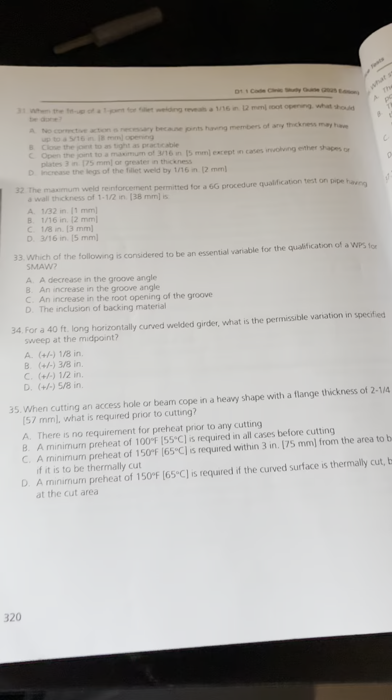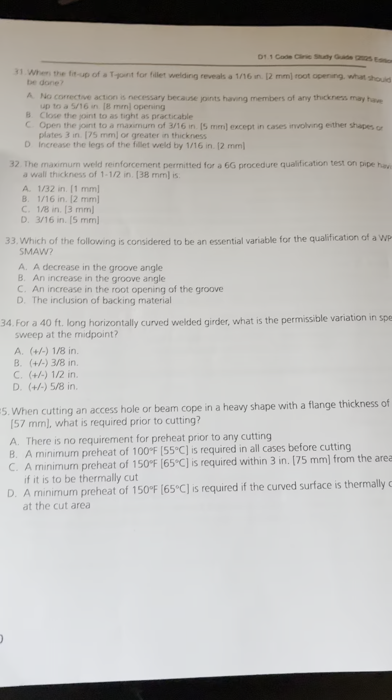Let's go for another question on the CWI test. For those who want to take the Certified Welding Inspector test, let's go ahead and see how to navigate the code book. Let's look at question number 31.

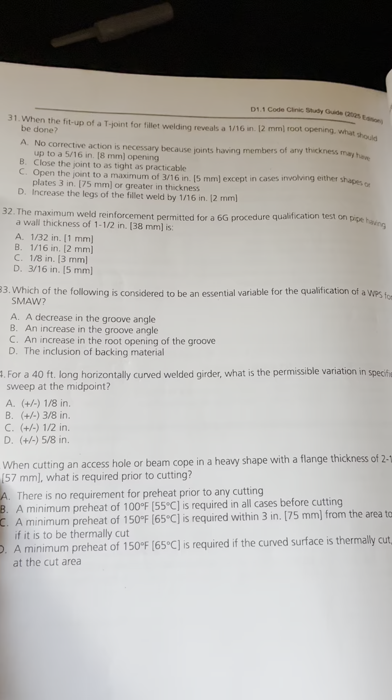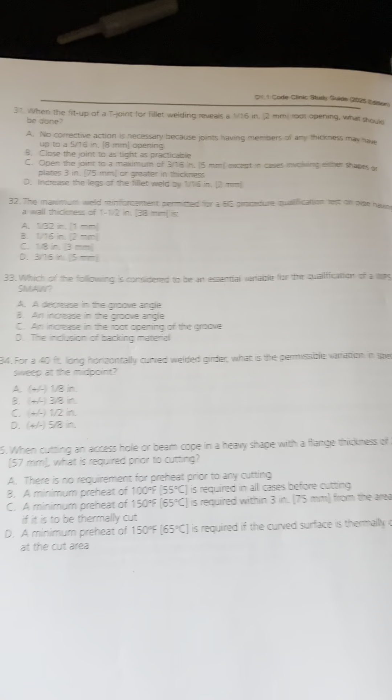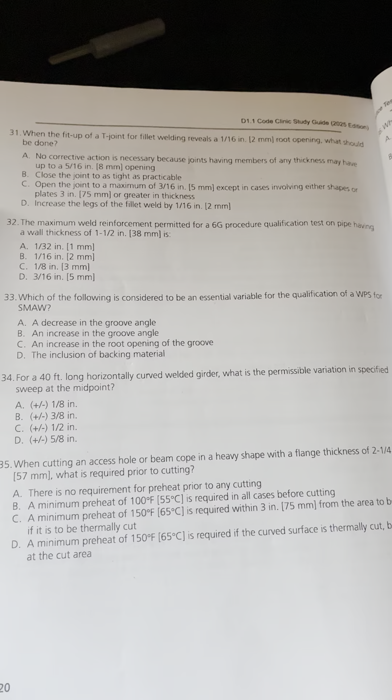When the fit up of a T-joint for fillet welding reveals a 1/16 root opening, what should be done? There are multiple ways to address these questions, but the easiest way I have found

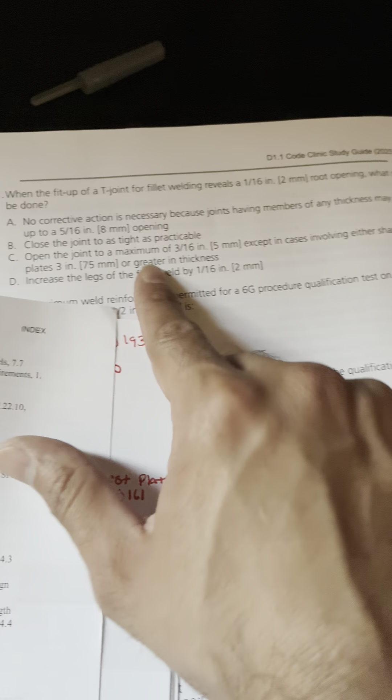is by going to the index. On your index, what are you going to do? I have tabs and I have notes, so there are keywords you need to look for. So you have fit up, T-joint for fillet welding.

So I'm going to look, because using the index is the easiest way for me to answer the questions, right? You need to put notes on it. So right here I have misalignment.

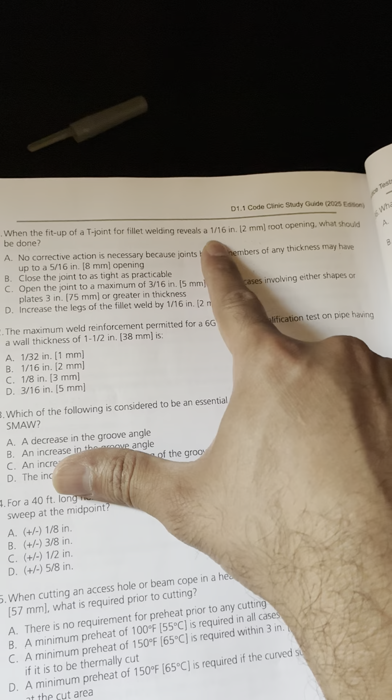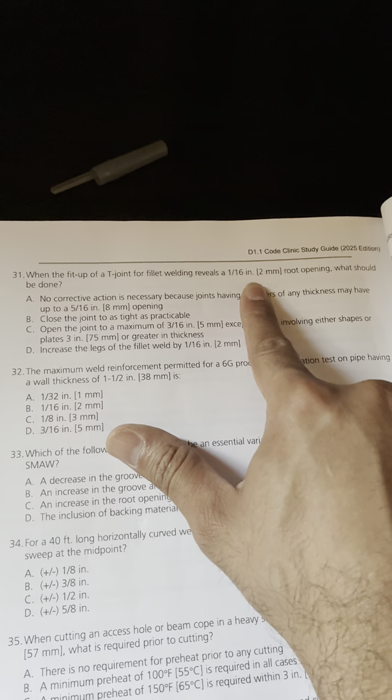So when you have a root opening, when you have a fit up opening - when the fit up of a T-joint fillet weld reveals a 1/16 root opening, what should you do? That means that 1/16 is not fit up flush. It has to be flush with the other base material when you're doing welding.

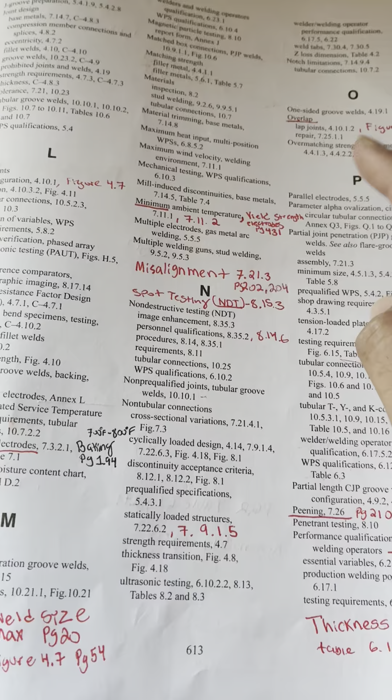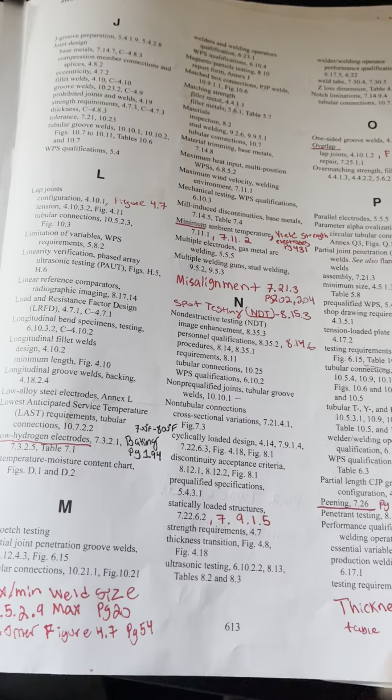So that guides me to misalignment. I put that on the notes. Not every topic you address on a CWI question will have an index entry, so what you need to do is put a note for whatever letter the keyword starts with, based on what the question is asking. You put a note - in this case I have the note, the clause, and also the page number.

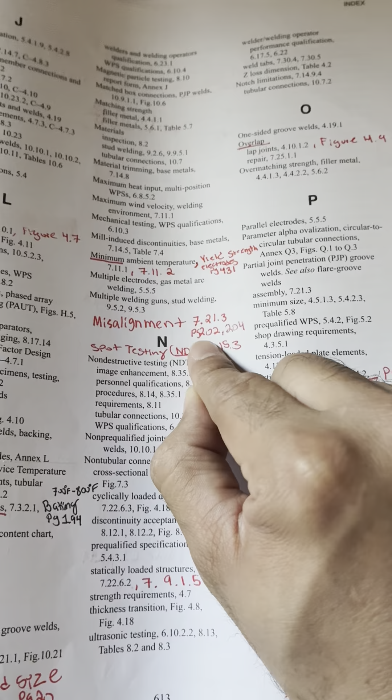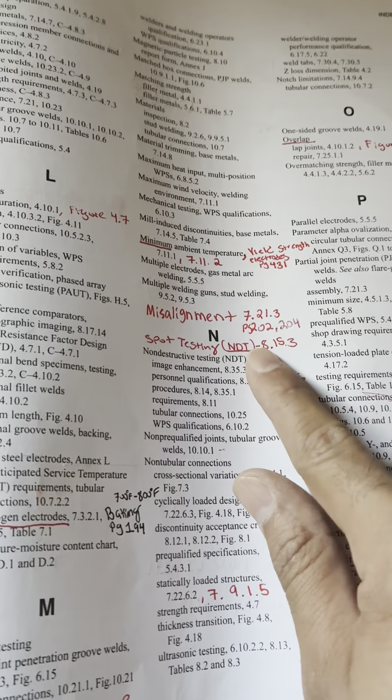On the CWI test you are timed, so you guys gotta be sharp and know exactly where to look. So I'm going to go for pages 202 and 204, which are relatively close to each other. Let's go to 202.

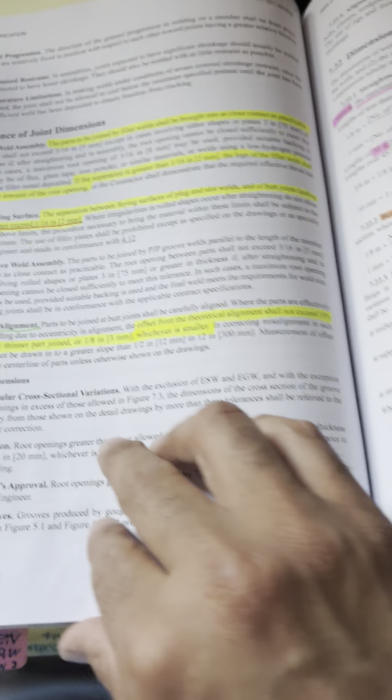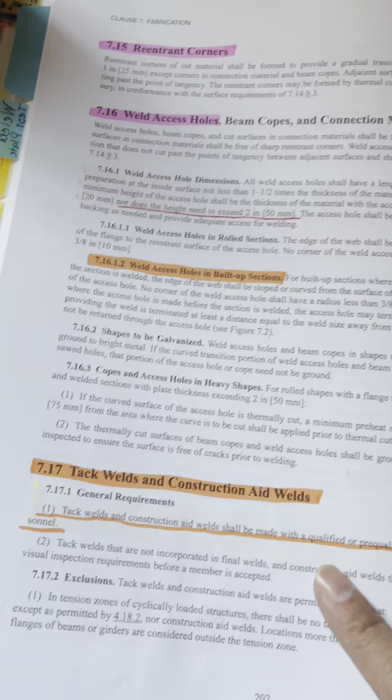Okay, so I have 202 - butt joint misalignment. But this is a root opening. So... let's see, weld access - nope, it's not here. Let's see - butt joint misalignment, fillet weld. Okay, fillet weld assembly - there you go.

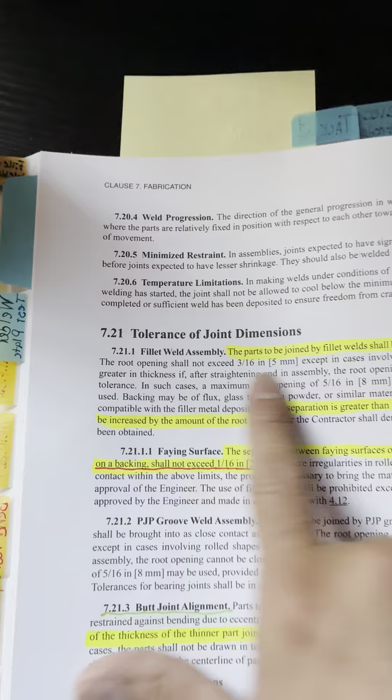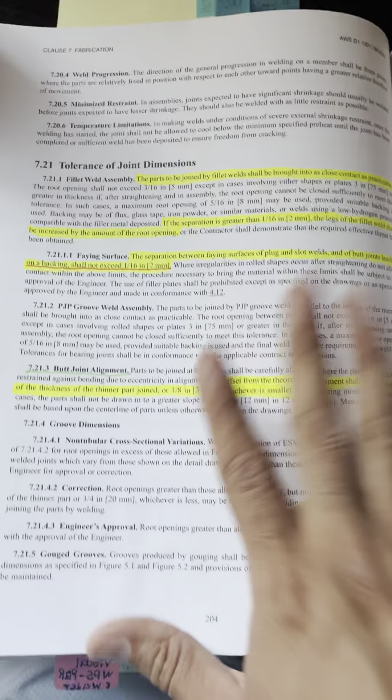So obviously you guys are going to have to make your own notes in the book. When it comes to part C of the CWI test, you will be able to put notes in your code book.

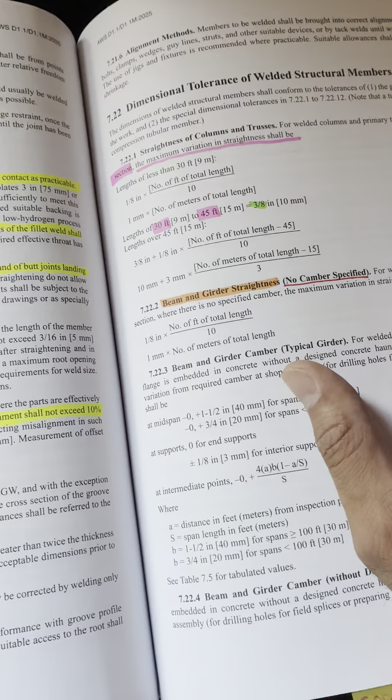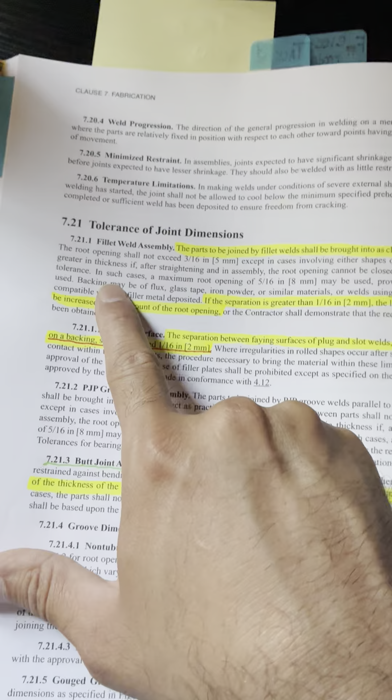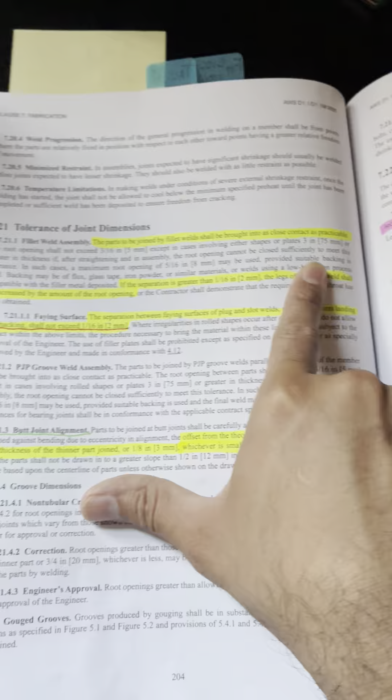Just make sure when you do your notes and highlighting, you keep it precise - anything just relating to the code. Fillet weld assembly: the parts to be joined by fillet weld should be brought into as close contact as practical. That is what's required based on the code.

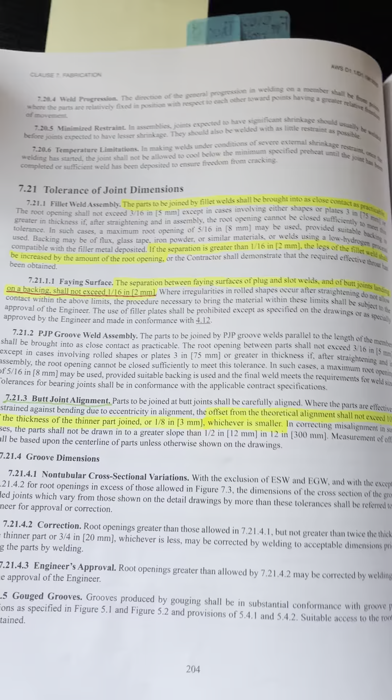Obviously the code goes through other things, like you have a minimum and a maximum, and depending on what the question is asking - minimum, maximum, or best practical - you go based on that. So now let's look at the answers.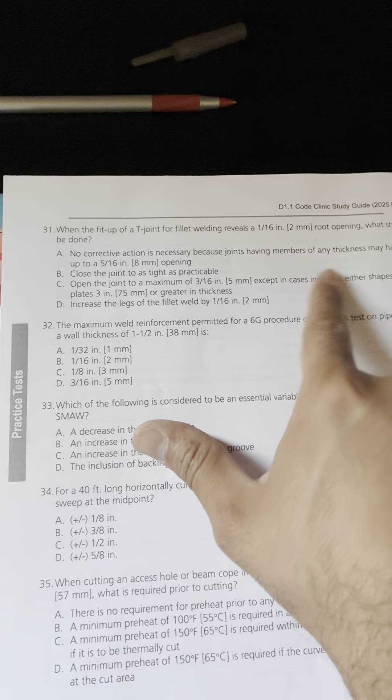No corrective action necessary, because a joint having members of any thickness may have up to 5/16. So let's go to clause 7.21, page 204.

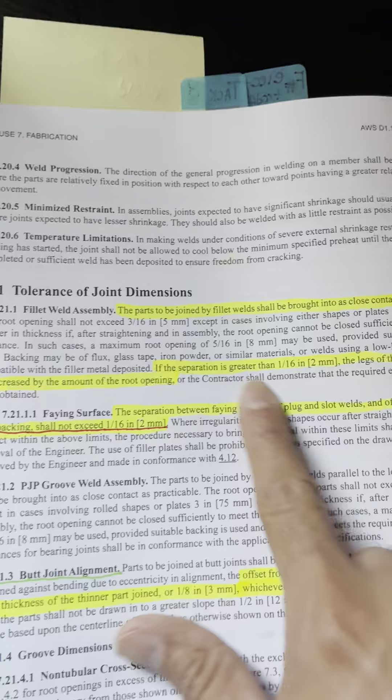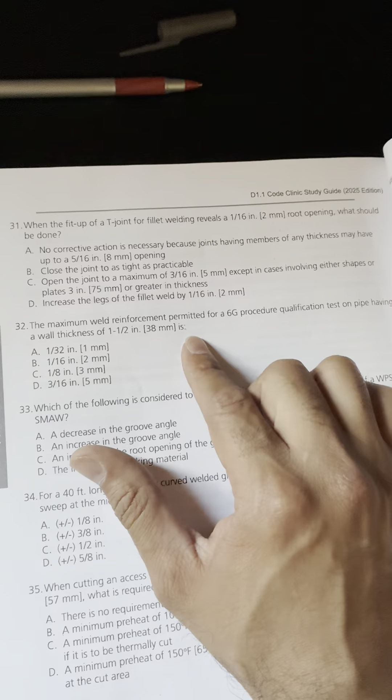Guys, you need to try to be familiarized with how to know what clause you're referring to. So the maximum root opening is 5/16. But it's not asking you for the maximum, so you've got to be careful about that detail in the question.

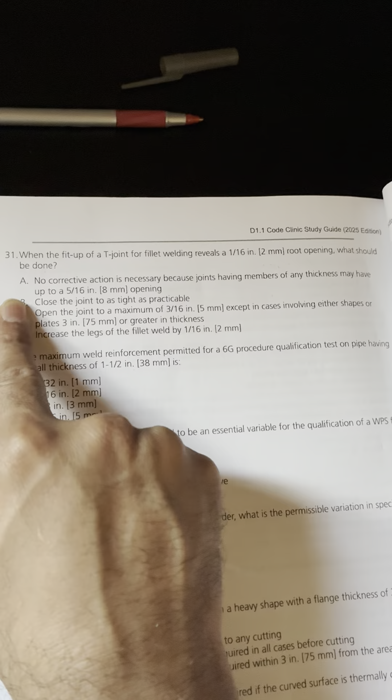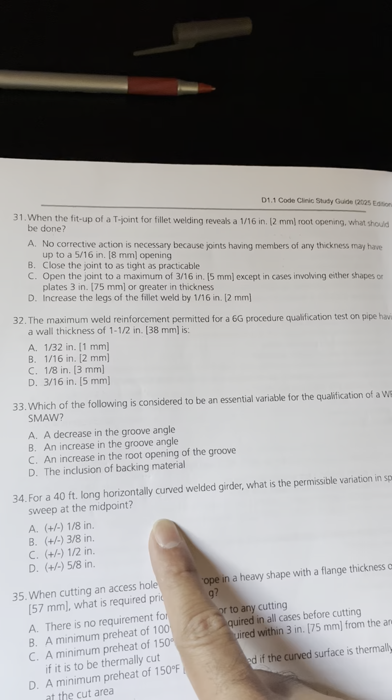So you may go for this one, but that's not going to be the best answer. Even though it refers to the code, it's only referring to part of what the code is saying - it's not the best answer. Close the joint as tight as practical - that's the first thing the clause asks you to do: close it and keep it tight.

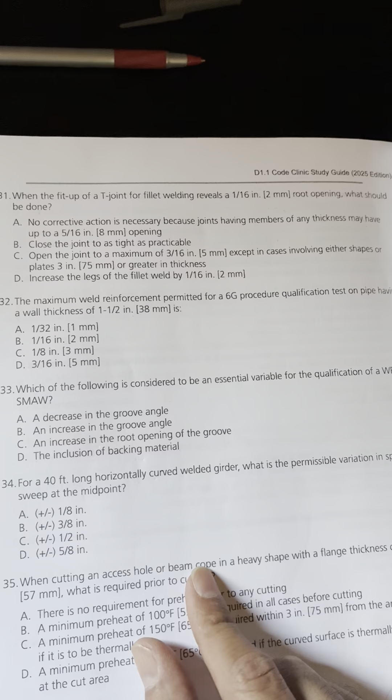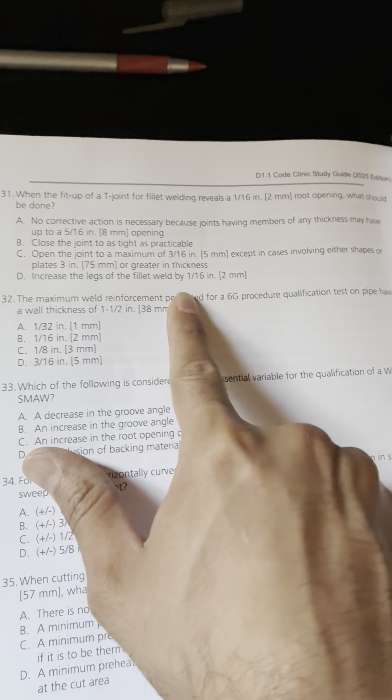Open the joint to the maximum 3/16 - you could easily eliminate that, because we already went back to the code and know that 5/16 is the maximum. So you could easily eliminate letter C. Increase the leg of the fillet weld by 1/16 - this is a true statement, but it would refer to a different question.

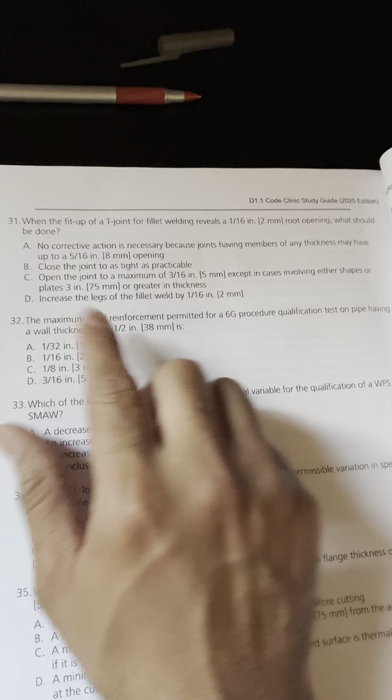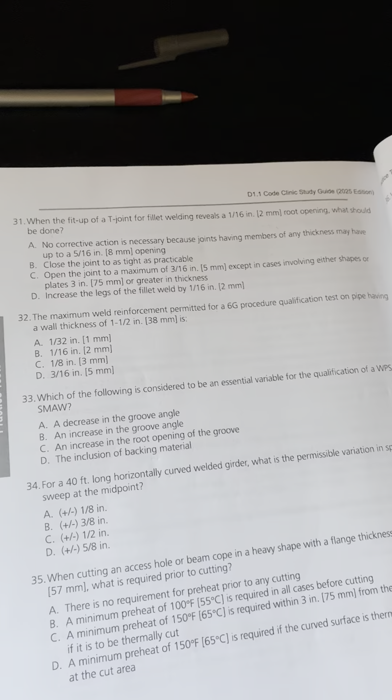What the question is asking, what should be done, just like question A, they're referring to what the code is explaining. But with this type of question where answers are close, you have to discern the first step to take based on what the code is asking.

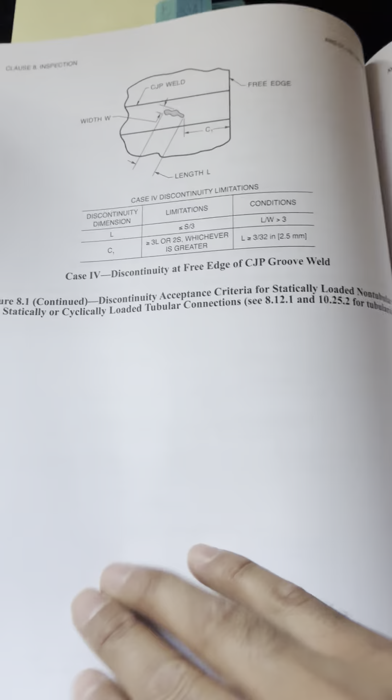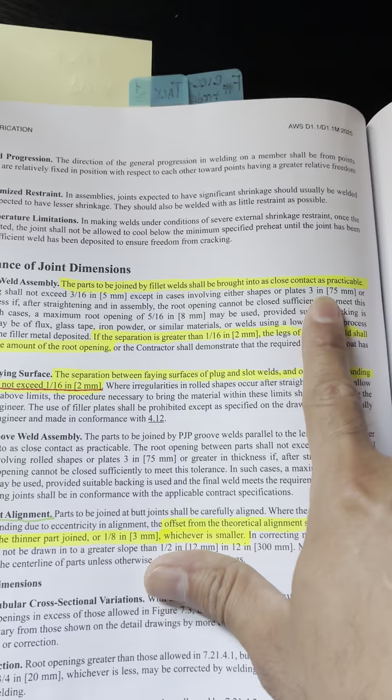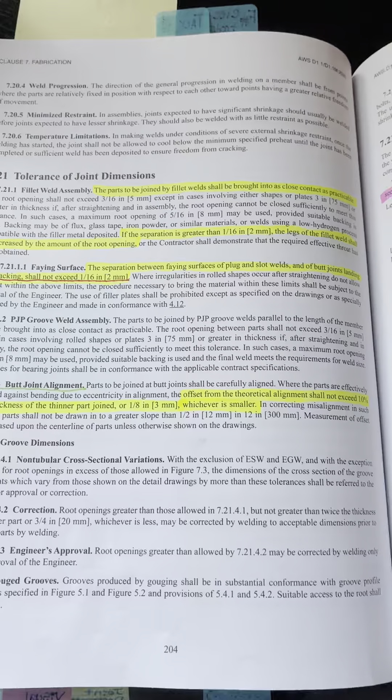I should keep this open so it could be faster. So with the code, the first thing it asks you is to bring it up into as close contact as practical, right? And welding doesn't start when you strike the arc - it does not start there.

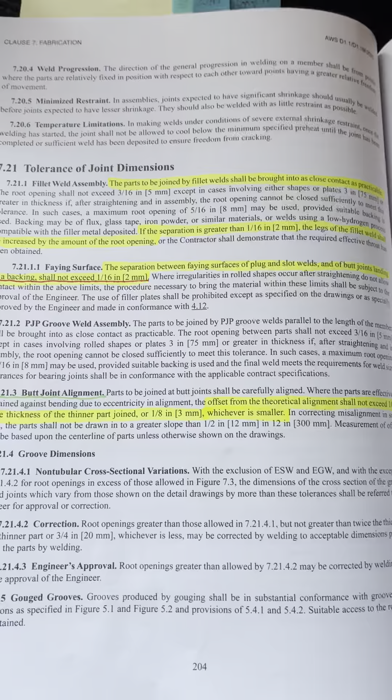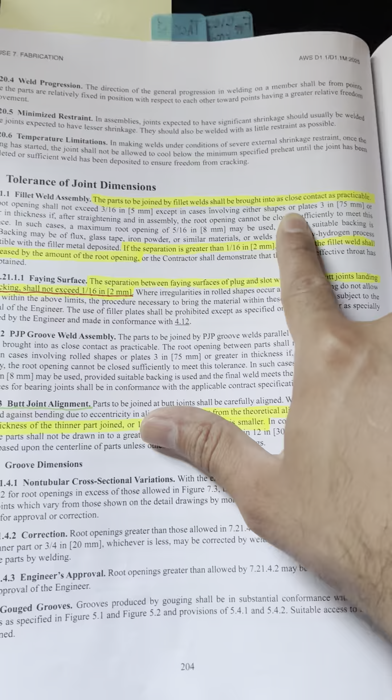It starts all the way back at material preparation - the quality of the cut, the fit of the metal together, all those variables count. So the way I understand it: first do it as best practice, close contact; if for some reason you cannot get it to the best practical, then you have a minimum and a maximum.